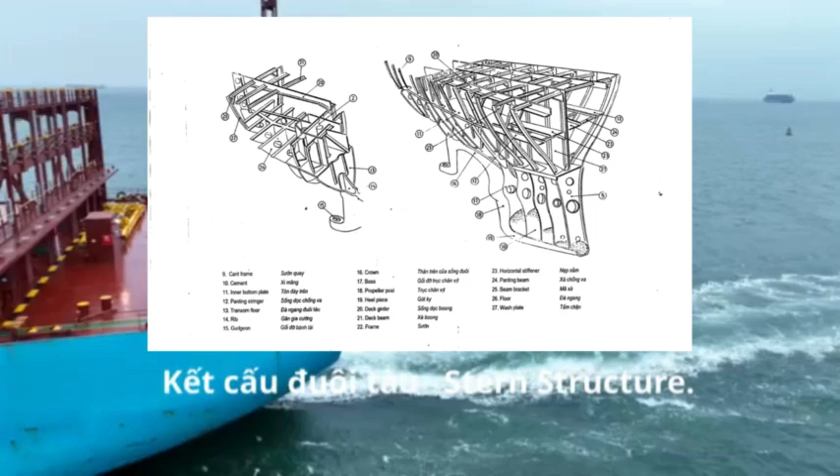Stern structure: After peak tank, or ket joy, is the tank located at the aft end of the ship's hull, and it's typically used for ballast or storing water.

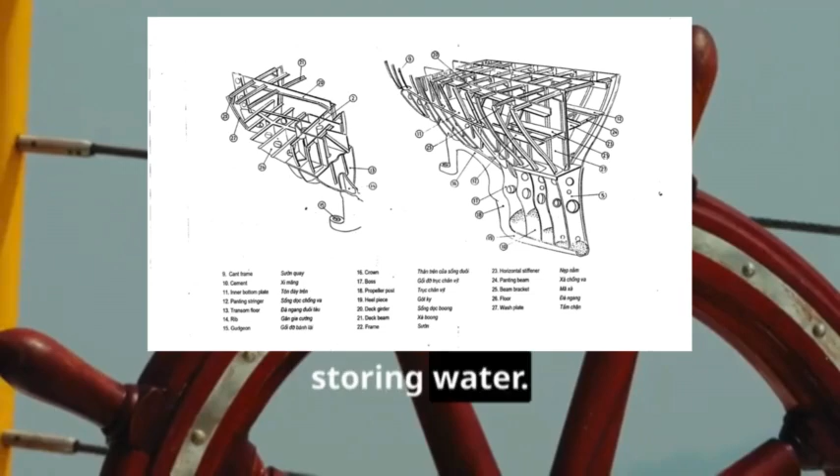Rudder stock trunk, or ham truck bank lai, is the shaft housing or trunk that holds the rudder stock, which connects the rudder to the ship and allows it to pivot for steering.

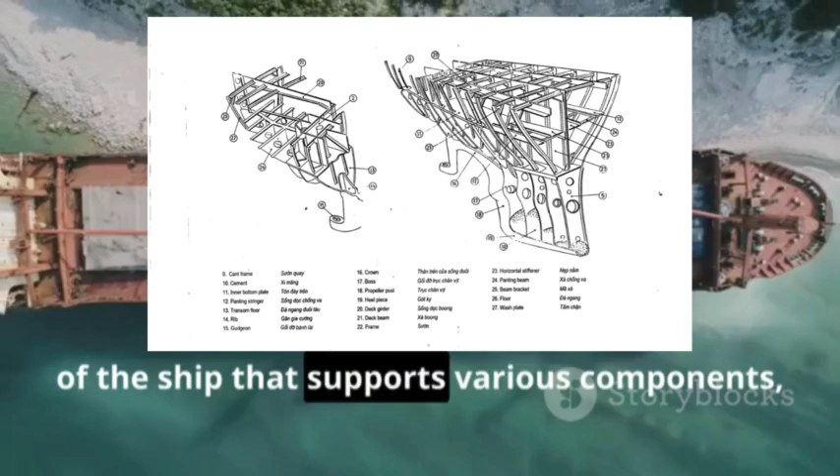Stern frame, or songjuoi, is the structural framework at the stern of the ship that supports various components, including the rudder. The rudder, or ban lai, is the steering mechanism of the ship, which pivots to control the ship's direction.

Deep floor, or jangang dang kao, is the reinforced floor structure of the ship's hull, often located deeper in the vessel for strength. Tank top plate, or ton nok ket, is a plate covering the top of the tanks, providing structural support.

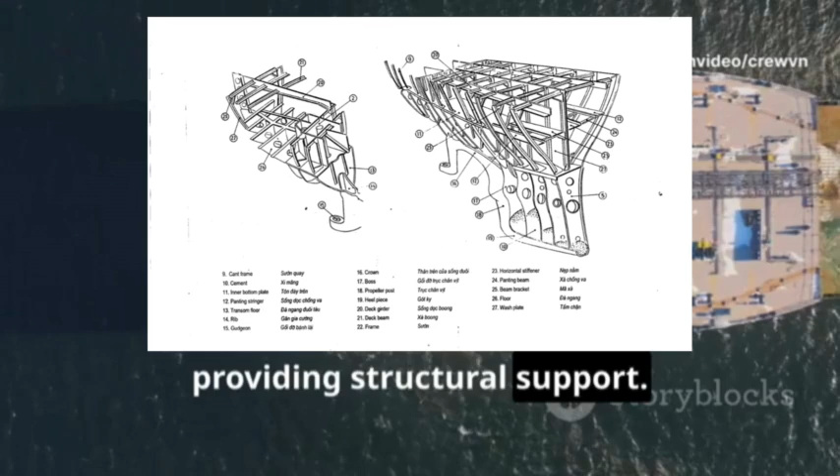Upper deck, or bung tren, is the uppermost level of the ship's deck, providing a surface for operations and supporting various components. After peak bulkhead, or bach joy, is the bulkhead at the aft end of the ship, separating the after peak tank from the rest of the hull.

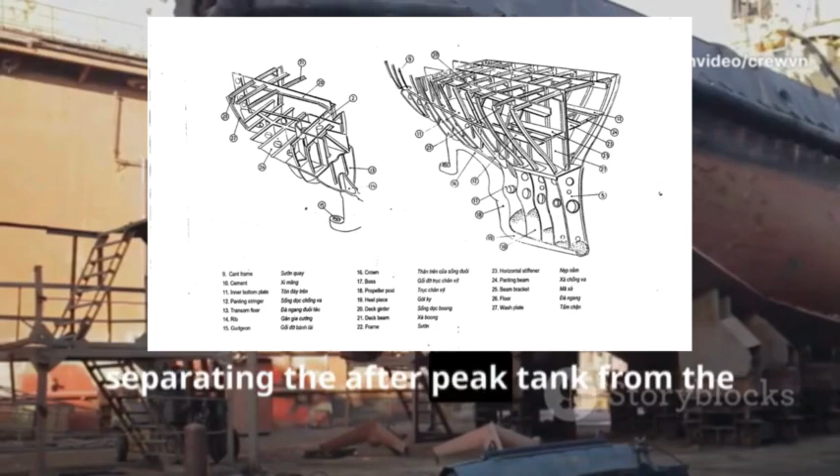Stuffing box bulkhead, or bach hop kin, is a bulkhead designed to seal off the stuffing box, which contains the propeller shaft, preventing water from entering the ship.

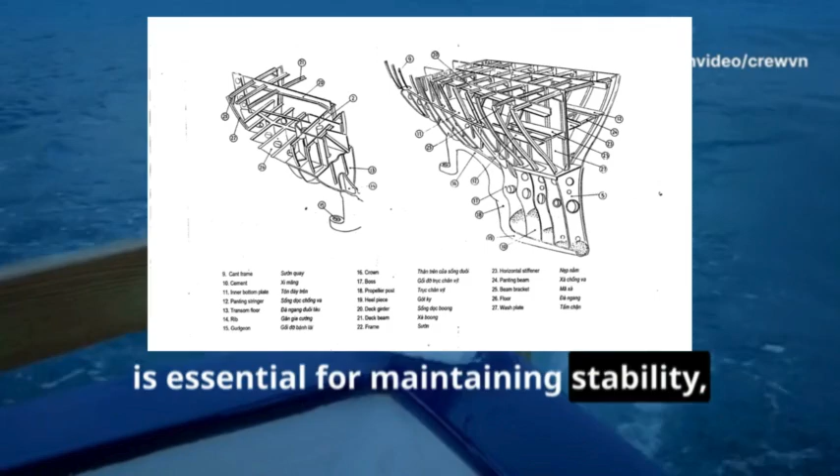The structure at the stern of the ship is essential for maintaining stability, controlling direction, and housing vital ship functions like the rudder and ballast tanks.

Stern structural elements include the cant frame, or sườn quay, which is part of the ship's frame that helps provide strength and support at the stern. Cement, or xi măng, likely refers to material used in the construction process for reinforcement.

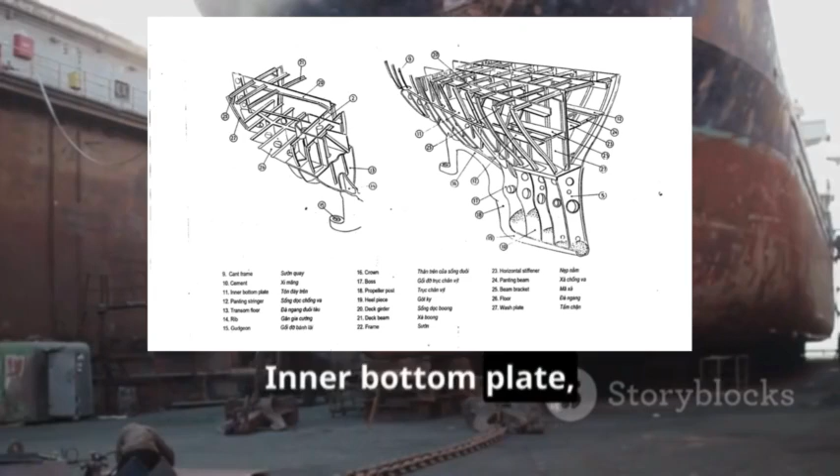Inner bottom plate, or tôn đáy trên, is the plate located at the bottom of the ship, contributing to the overall hull structure. Panting stringer, or sống dọc chống va, are structural beams that prevent deformation from the pressure exerted by waves.

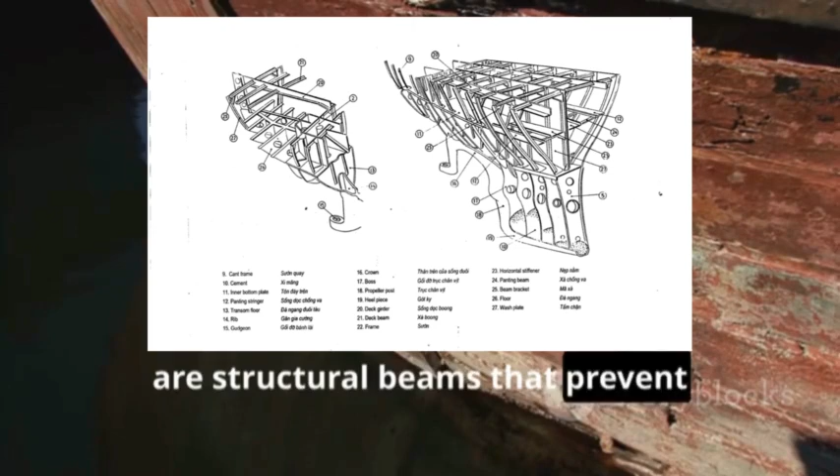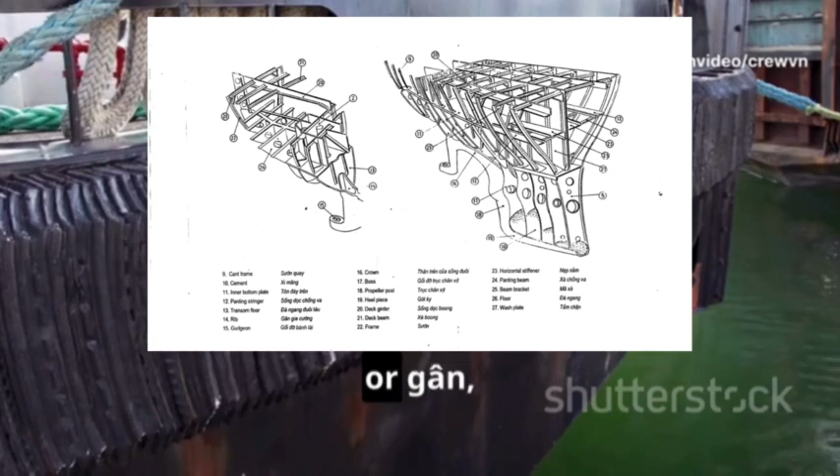Transom floor, or đà ngang đuôi tàu, is a part of the floor structure at the transom, the aft end of the ship. Rib, or gân, are structural elements running perpendicular to the ship's frames, providing shape and support to the hull.

Gudgeon, or gối đỡ bánh lái, is a bearing for the rudder post, facilitating the rudder's movement. Crown, or thân trên của sống đuôi, refers to the uppermost part of a hull section or structure.

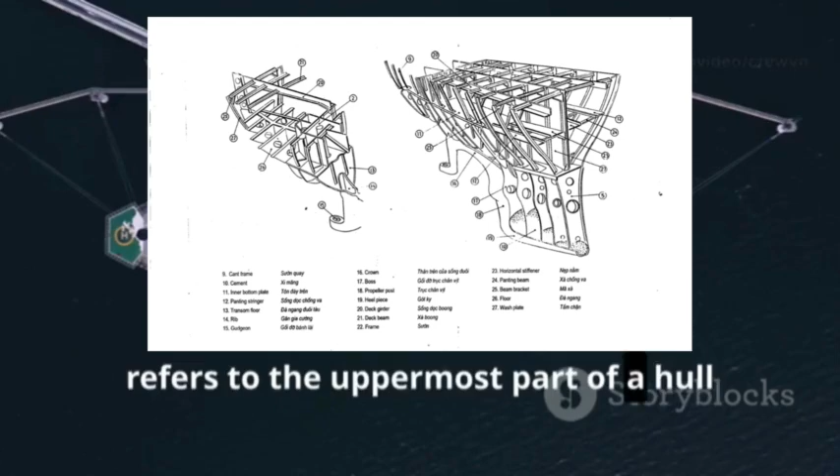Boss, or gối đỡ trục chân vịt, is the fitting that supports the propeller shaft. Propeller post, or trục chân vịt, is the post that holds and supports the propeller shaft.

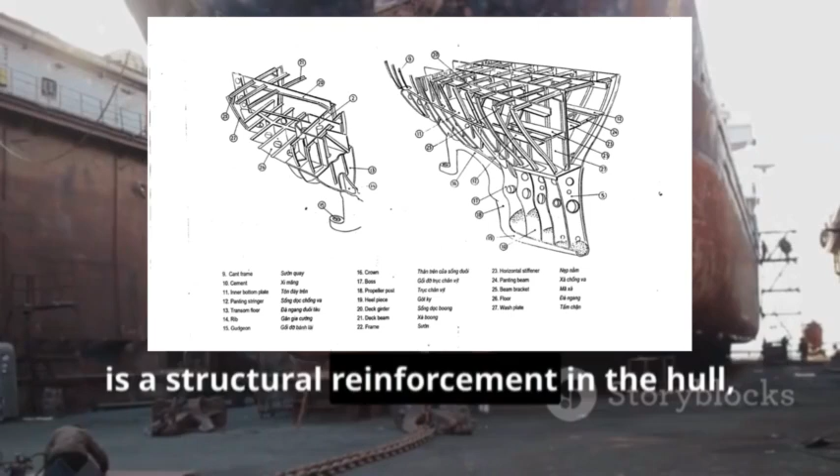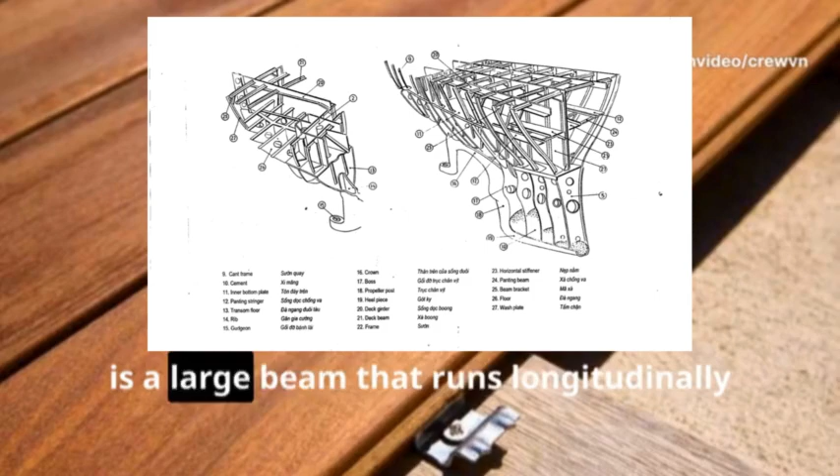Heel piece, or gót ky, is a structural reinforcement in the hull, located near the stern. Deck beam, or xà boong, is the horizontal beam that supports the deck. Deck girder, or sống dọc boong, is a large beam that runs longitudinally along the deck for added support.

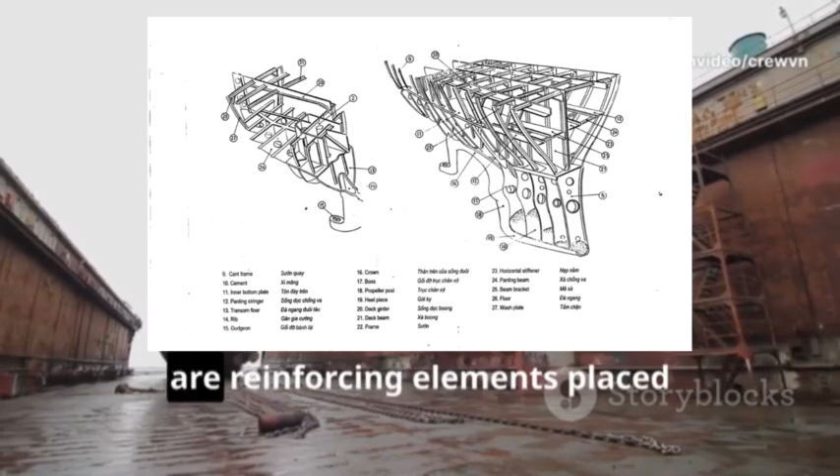Frame, or sườn, is the primary structural support of the hull. Horizontal stiffener, or nẹp nằm, are reinforcing elements placed horizontally to strengthen the hull. Crown, or thân trên của sống đuôi, is part of the ship's upper structure that helps give shape and strength to the hull.

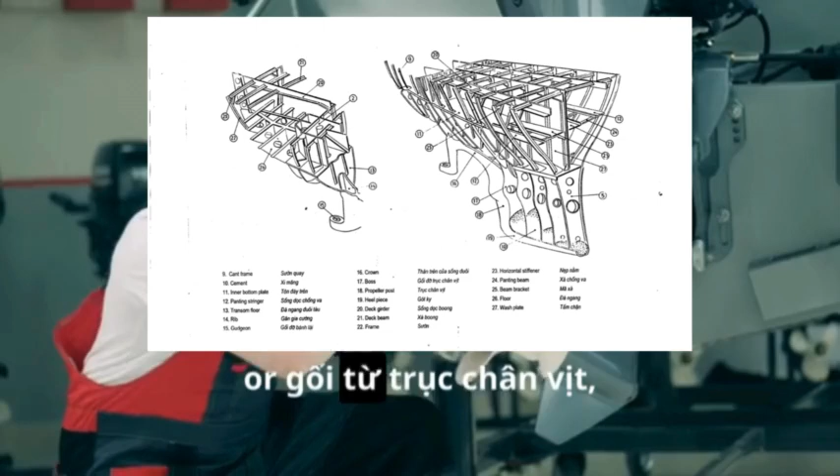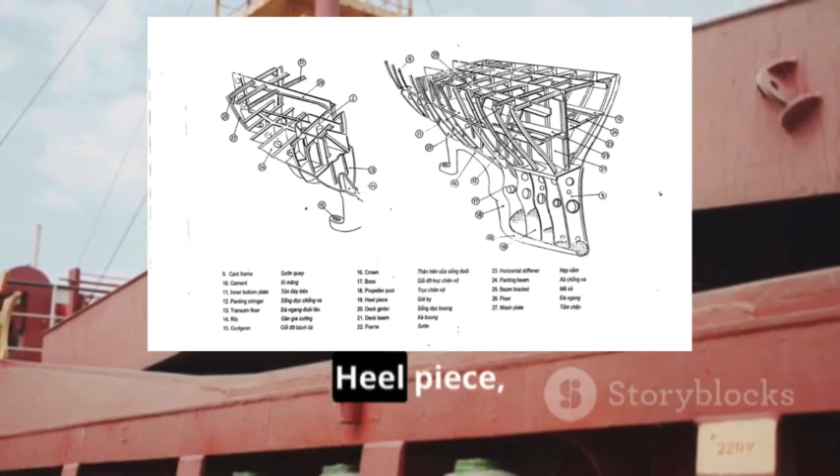Boss, or gối đỡ trục chân vịt, again refers to the propeller shaft bearing. Propeller post, or trục chân vịt, once more refers to the shaft that drives the propeller, ensuring propulsion. Heel piece, or gót ky, as mentioned earlier, supports the hull at the stern.

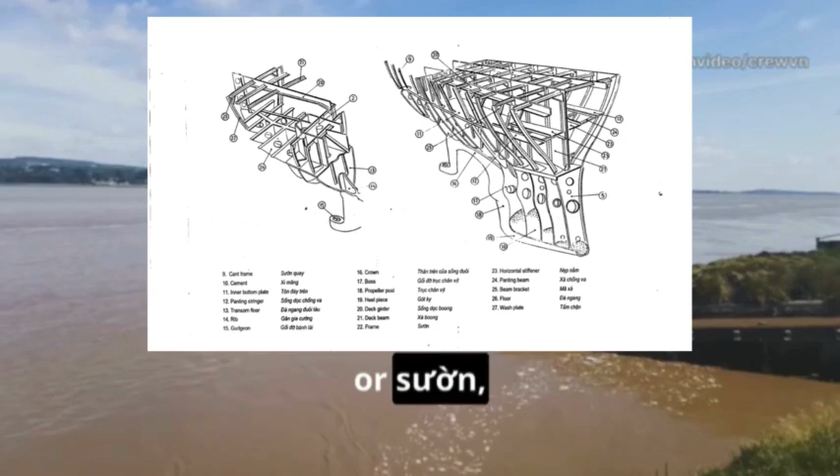Deck beam, or xà boong, is a major part of the deck's structural support system. Frame, or sườn, provides framework and overall structure to the hull, forming its shape.

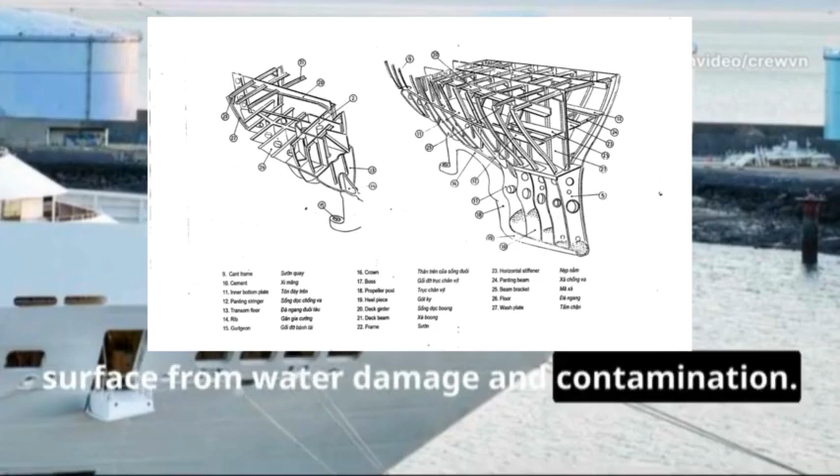Wash plate, or tam chan, is a plate that shields the ship's surface from water damage and contamination. Horizontal stiffener, or nep nam, adds additional strength to the hull in a horizontal orientation.

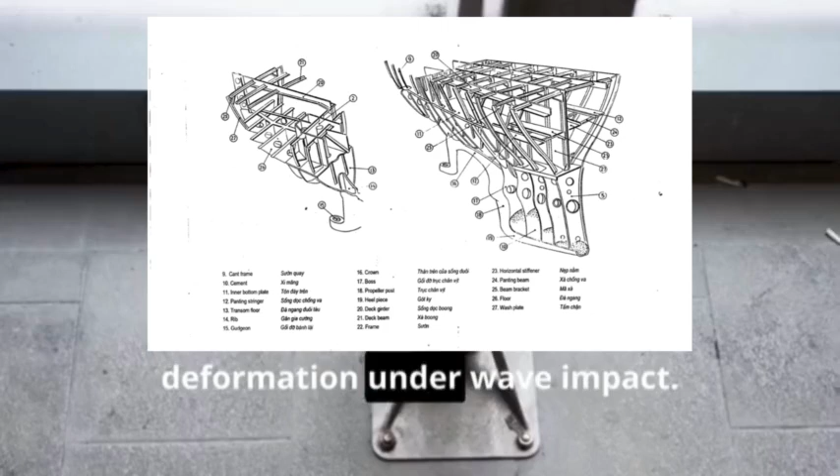Panting beam, or xà chống va, is a beam installed to prevent deformation under wave impact. Beam bracket, or mã xà, is a component that provides support and attachment for beams. Floor, or đà ngang, is the floor structure providing stability to the hull.